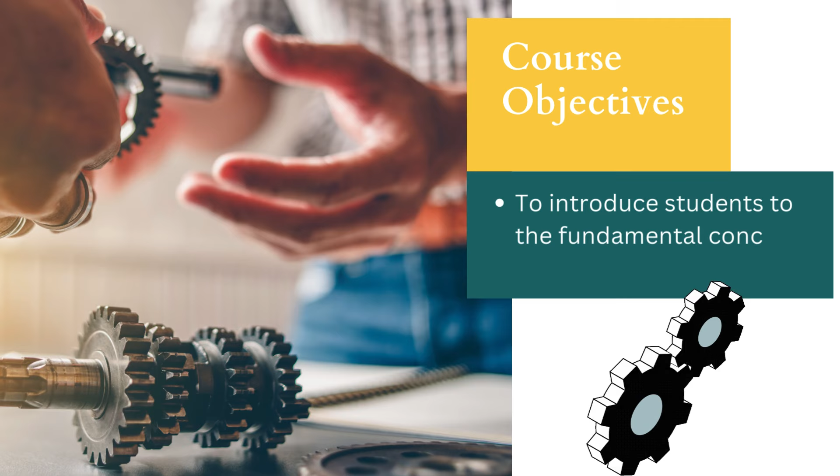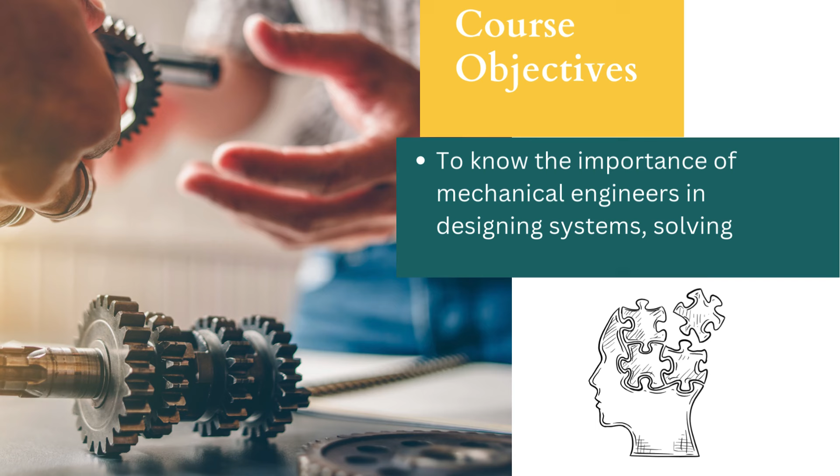The objective of this course is, first and foremost, to introduce students to the fundamental concepts of mechanical engineering. The second objective is to enable students to understand the importance of mechanical engineers in system design, solving real-world problems, and driving innovation, as well as their broad applications in various industries: automotive, aerospace, energy, robotics, etc.

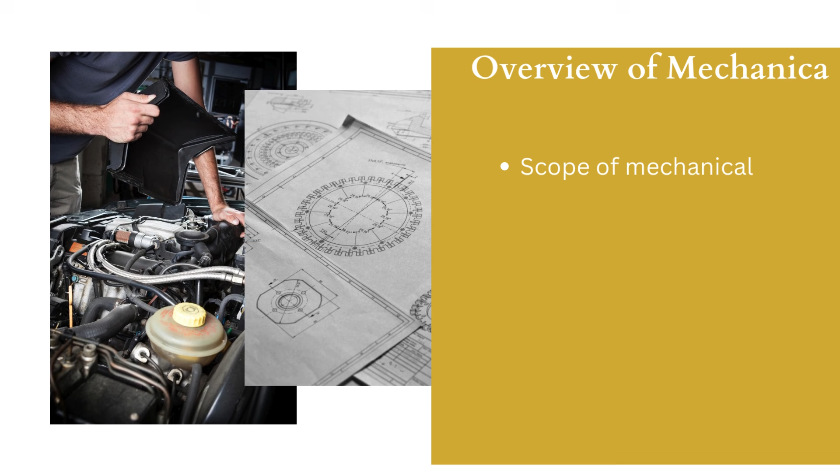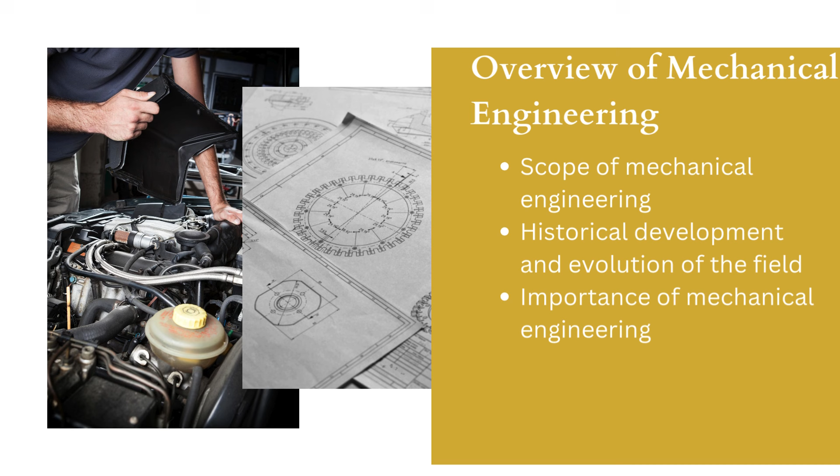In this chapter, we will provide an overview of mechanical engineering. We will cover the scope of mechanical engineering, the historical development and evolution of the field, the importance of mechanical engineering in modern society, and the role of mechanical engineers.

Now let's explore the scope of mechanical engineering. Automotive: design and optimize vehicles for performance, safety, and fuel efficiency. Aerospace: develop aircraft, spacecraft, and propulsion systems for commercial, defense, and space exploration.

Energy: innovate power generation systems, renewable energy solutions, and efficient energy storage technologies. Mechanical engineering plays a crucial role in advancing these industries and shaping the future.

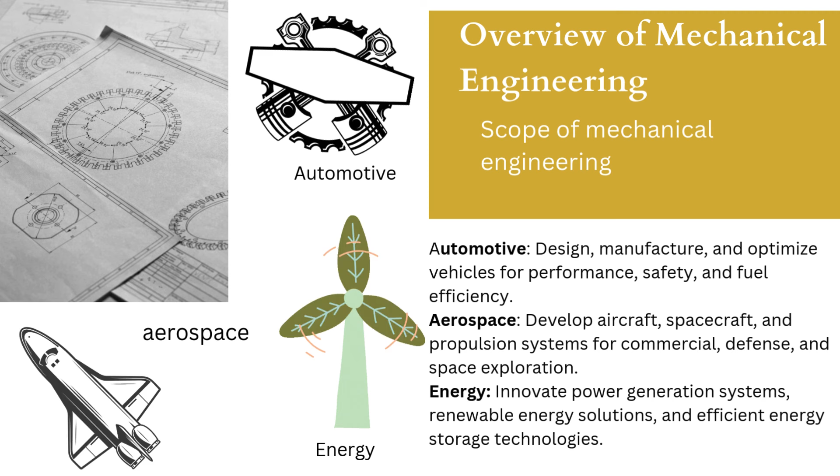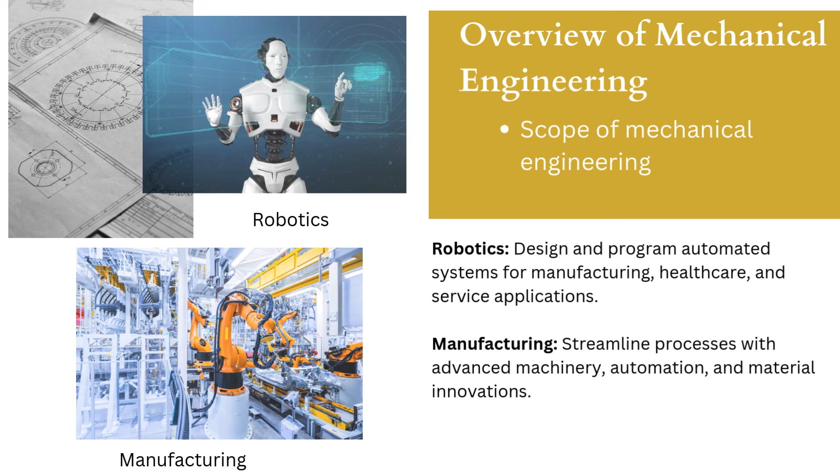Now let's continue with the scope of mechanical engineering. Robotics: design and program automated systems for manufacturing, healthcare, and service applications. Manufacturing: optimize processes using advanced machinery, automation, and innovative materials. These areas highlight how mechanical engineers drive efficiency and innovation across industries.

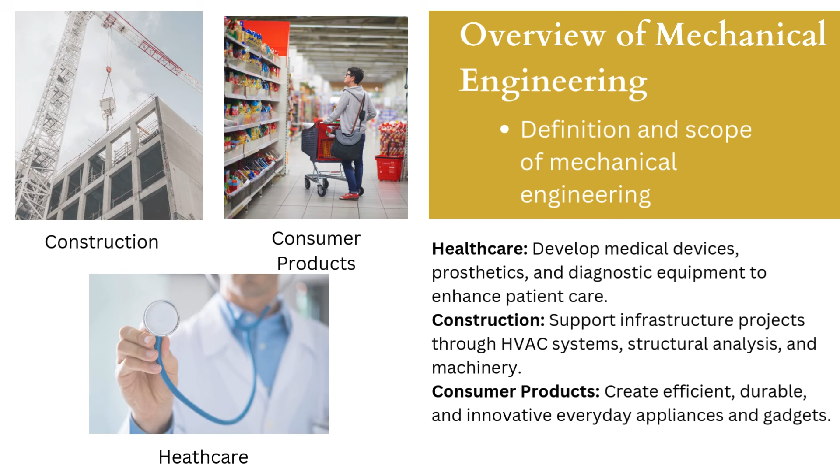Continuing with the scope of mechanical engineering, healthcare: develop medical devices, prosthetics, and diagnostic equipment to improve patient care. Construction: contribute to infrastructure projects with HVAC systems, structural analysis, and machinery. Consumer products: design efficient, durable, and innovative appliances and gadgets for daily use. These fields showcase the versatility and impact of mechanical engineering on society.

Let's now look at the historical development and evolution of mechanical engineering. The field began with the creation of ancient tools and simple machines, laying the foundation for human innovation. It advanced significantly during the Industrial Revolution with groundbreaking inventions like the steam engine, transforming industries and societies. Today, mechanical engineering embraces cutting-edge technologies, including robotics, nanotechnology, and AI, driving innovation in every sector and shaping the future.

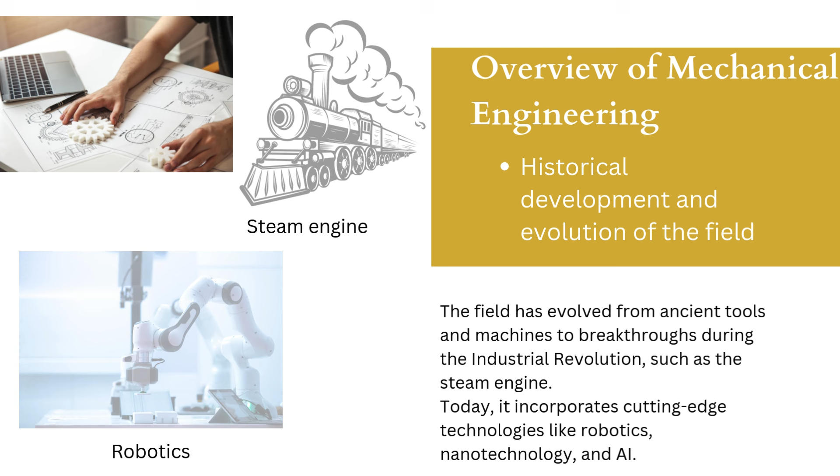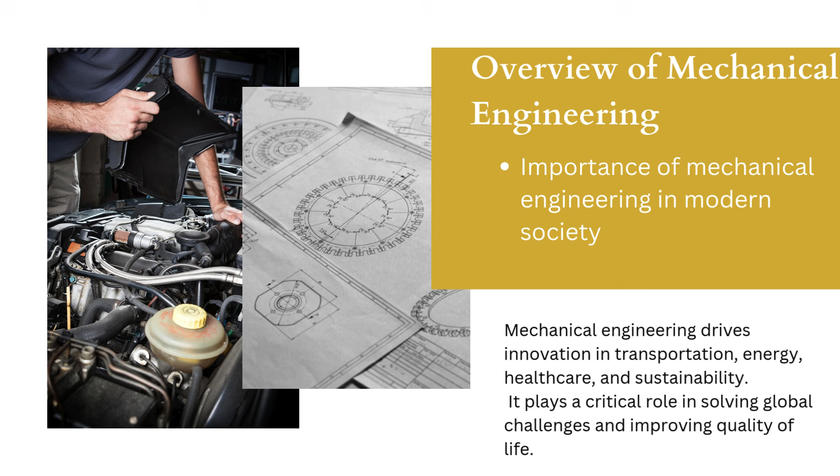Moving on, let's explore the importance of mechanical engineering in modern society. Mechanical engineering is at the heart of innovation, driving progress in transportation, energy, healthcare, and sustainability. It tackles global challenges, creates solutions for a better world, and continuously improves our quality of life through groundbreaking advancements.

Next, let's examine the role of mechanical engineers. One of their primary roles is design and development. Mechanical engineers create innovative solutions for systems, machines, and products, ensuring they are both functional and efficient. Their work shapes industries and drives progress, from everyday appliances to advanced technological systems.

Another key role of mechanical engineers is analysis and problem solving. They evaluate mechanical systems to identify issues and improve performance. Through optimization and innovation, they ensure systems operate efficiently and reliably, addressing challenges in industries ranging from manufacturing to energy.

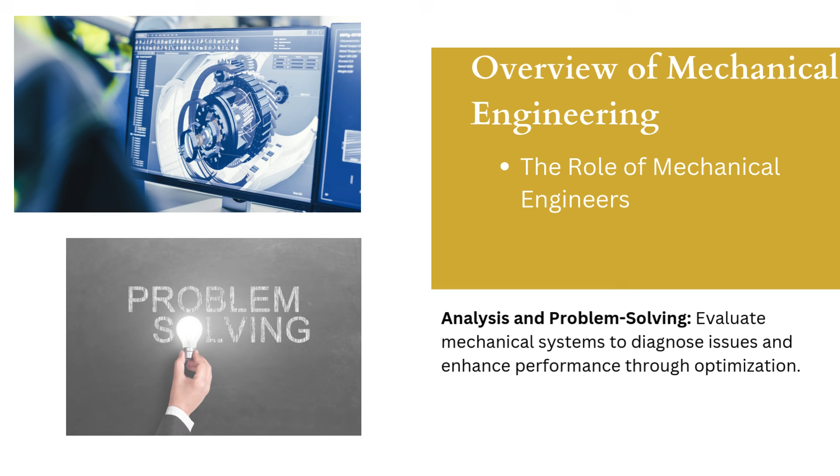Additionally, mechanical engineers play a crucial role in manufacturing oversight. They supervise production processes, ensuring that products meet quality standards, adhere to safety regulations, and remain cost-effective. Their expertise ensures that manufacturing operations run smoothly and efficiently, contributing to the success of industries worldwide.

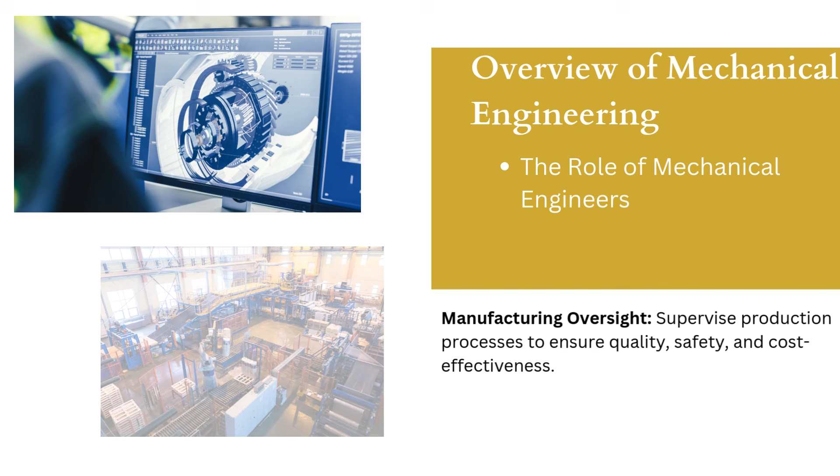Energy systems are another vital focus area for mechanical engineers. They develop and maintain renewable energy solutions, design power plants, and create energy-efficient technologies. By advancing sustainable energy systems, mechanical engineers play a key role in addressing global energy demands and combating climate change.

Another significant area of focus for mechanical engineers is automation and robotics. They design cutting-edge automated systems and robots that enhance efficiency and precision in industries such as manufacturing, healthcare, and logistics. These advancements contribute to improving productivity and reshaping modern industry practices.

Another important aspect of the mechanical engineer's role is material selection. They choose materials based on their properties to meet the specific demands of a project. This decision is crucial for ensuring the strength, durability, and cost-effectiveness of the final product, and it impacts the overall performance and longevity of systems across various industries.

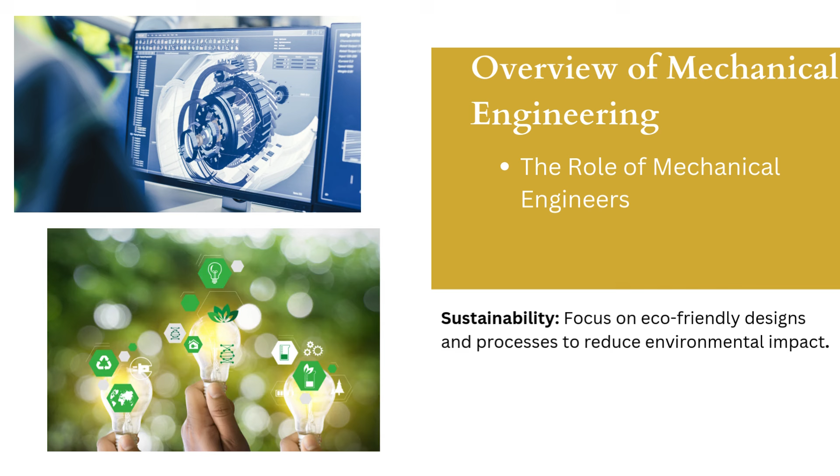Sustainability is a growing priority for mechanical engineers. They focus on designing eco-friendly solutions and improving processes to reduce environmental impact. By incorporating sustainable practices, such as energy-efficient systems and the use of renewable materials, mechanical engineers play a critical role in promoting environmental responsibility across industries.

Finally, project management is a crucial aspect of a mechanical engineer's role. They lead teams, manage budgets, and ensure that projects are delivered on time and within scope. Their organizational and leadership skills are essential for coordinating complex projects, ensuring efficiency, and meeting both technical and business objectives.

In this chapter, we will cover the following key concepts: mechanics, thermodynamics, material science, fluid mechanics, manufacturing processes, and control systems. These concepts are the foundation of mechanical engineering, essential for understanding and solving engineering problems.

Let's begin with mechanics. Mechanics is the study of forces, motion, and their effects on objects. It includes two main branches: statics, which focuses on forces in equilibrium, and dynamics, which deals with the motion of objects and the forces that cause that motion. These principles are fundamental for analyzing and designing mechanical systems.

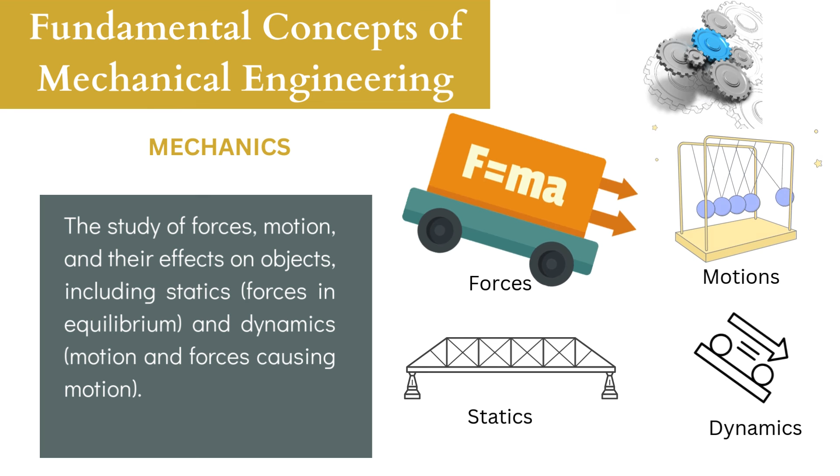Next, we move on to thermodynamics. Thermodynamics is the science of energy, heat transfer, and their transformations. It focuses on understanding how energy flows and changes form, with applications in power generation, engines, refrigeration systems, and more. This field is crucial for optimizing energy efficiency and developing sustainable solutions.

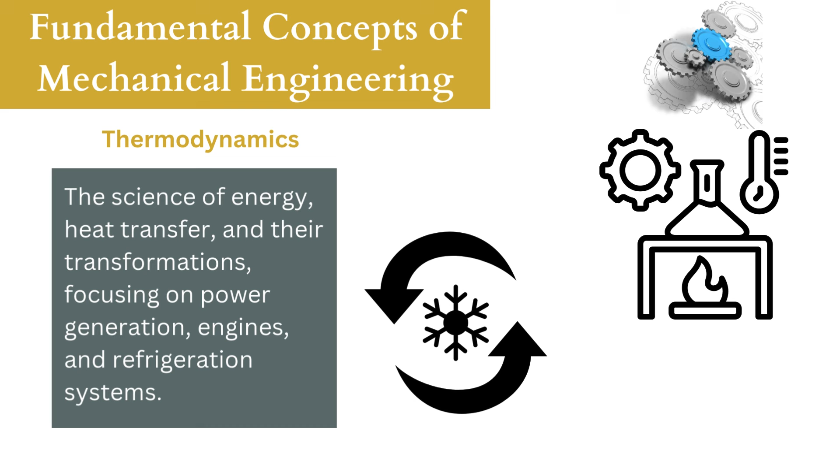Now, let's look at fluid mechanics. Fluid mechanics is the study of fluids, both liquids and gases, in motion and at rest. It has wide applications in fields like hydraulics, aerodynamics, and energy systems, where understanding how fluids behave is essential for designing efficient systems, from pumps and turbines to airplanes and weather systems.

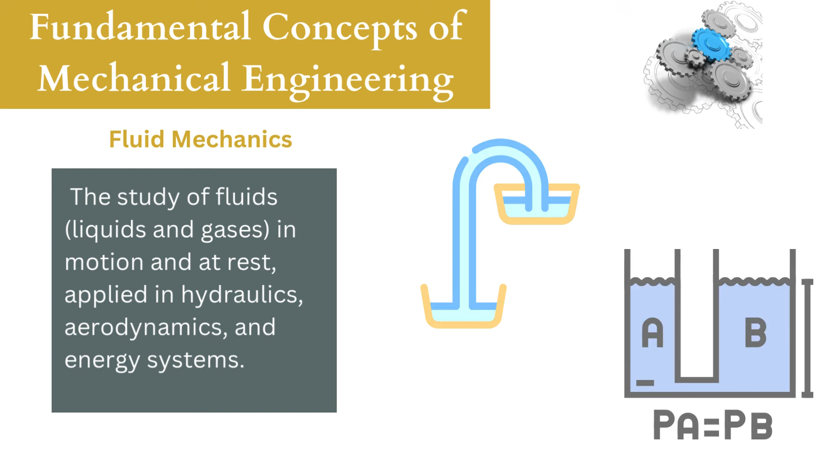Next, we move on to material science. Material science focuses on understanding the properties, behavior, and selection of materials. It ensures that the right materials are chosen to meet the strength, durability, and efficiency requirements of designs. This field is essential for developing innovative products and optimizing the performance of mechanical systems.

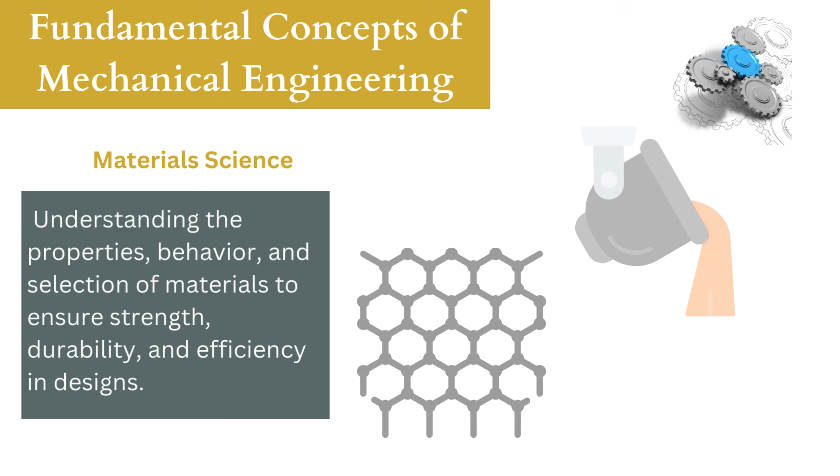Moving on to manufacturing processes. Manufacturing processes involve techniques like machining, casting, welding, and 3D printing used to create mechanical components and products. These methods are essential for transforming raw materials into functional parts, ensuring precision, quality, and efficiency in production.

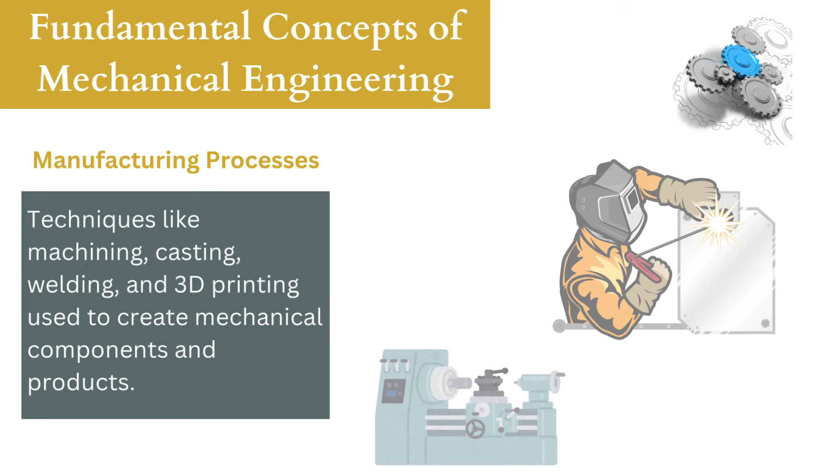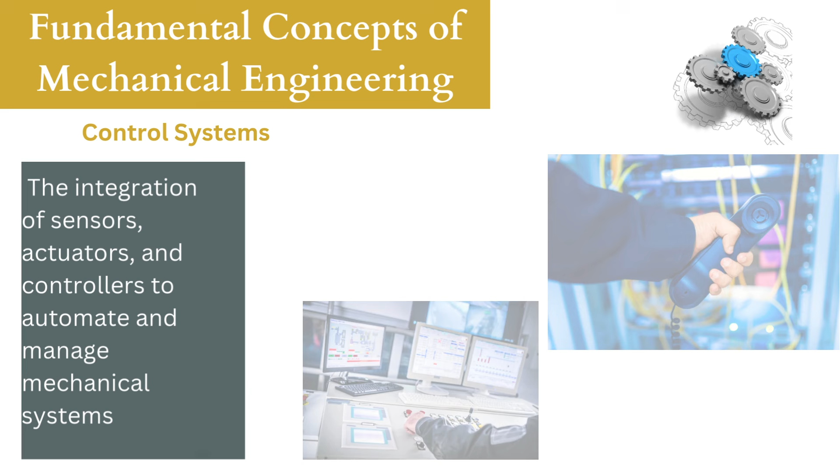Finally, let's discuss control systems. Control systems involve the integration of sensors, actuators, and controllers to automate and manage mechanical systems. These systems ensure precision and reliability, playing a vital role in modern technologies like robotics, industrial automation, and vehicle systems.

What's next? In the upcoming courses, we'll dive deeper into the fundamentals of mechanical engineering. Topics will include mechanics, thermodynamics, fluid dynamics, material science, and design and manufacturing. Each subject will be explored in detail, providing a solid foundation to build your expertise step by step. These courses will equip you with the essential tools to tackle engineering challenges, drive innovation, and contribute to advancing technology.

Together, we'll explore concepts that empower you to shape the future. Let's embark on this exciting journey and unlock the limitless potential of mechanical engineering.